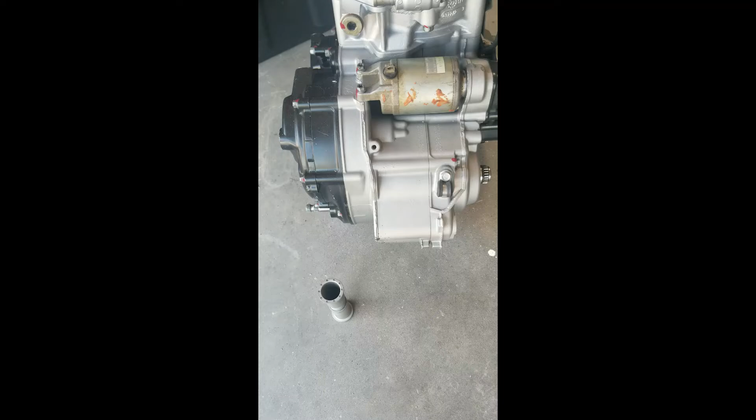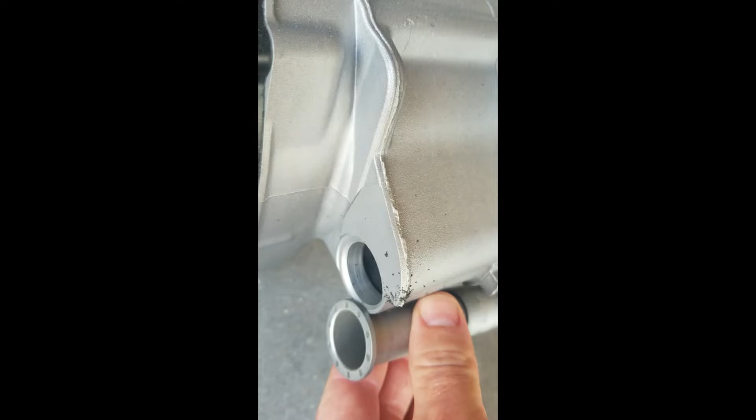Alrighty, so I'm getting ready to put the updated sleeve in this DS450 motor. This is the newer update, the last update they came out with for the cases. And as you can see, the cases get drilled out a little bit to accept this flush here. And then they'll go through both sides, right?

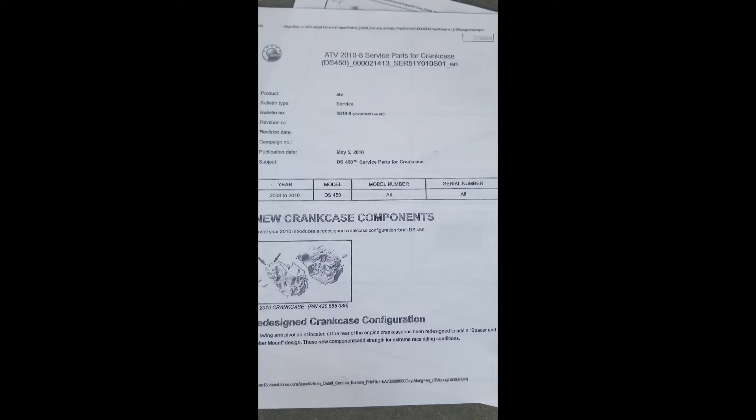And then this piece has a threaded center, and it has a right hand side and then a left hand side, as we're looking at the engine right now. Also, here are the actual installation instructions. So it talks about the new components, the redesign, what needs to get changed, the install and torques and stuff like that, the parts you need, the special socket holder, and then the torques in the back.

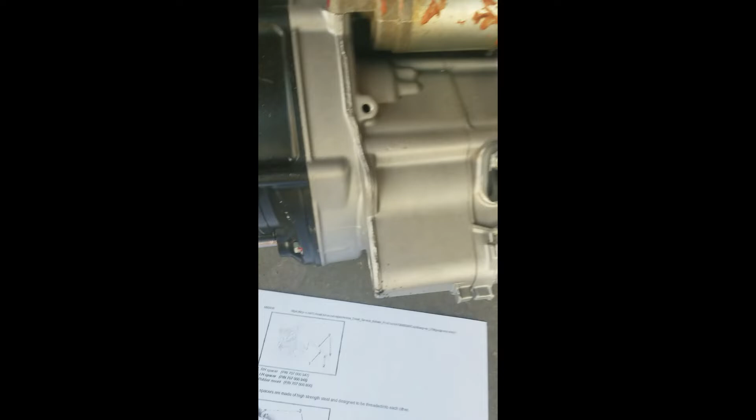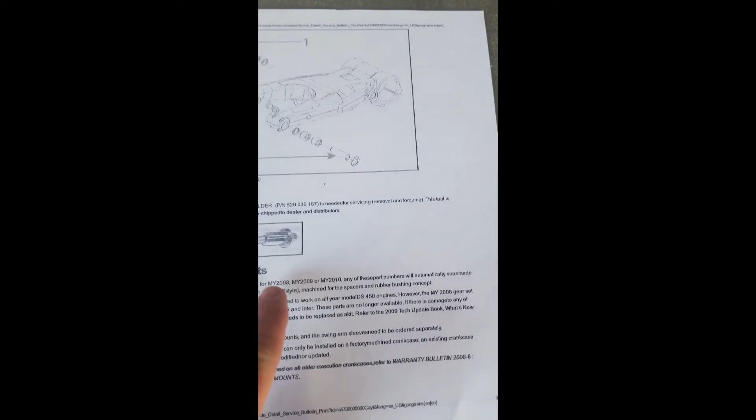It is possible to take the older cases, the 2008s and such, and get those cases re-drilled. The only place I know that does it is actually BCS in Massachusetts. They will do it, but you need the engine apart to ship it to them. As far as I know, the engine needs to be apart. If you order a 2011 and up, those cases should already be ready for this version. I believe so, just reading the instructions here, where it talks about model year 8, 9, 10. Anything else would be superseded.

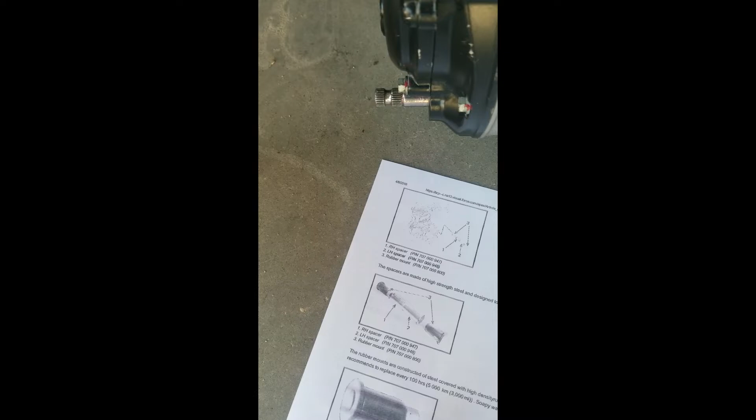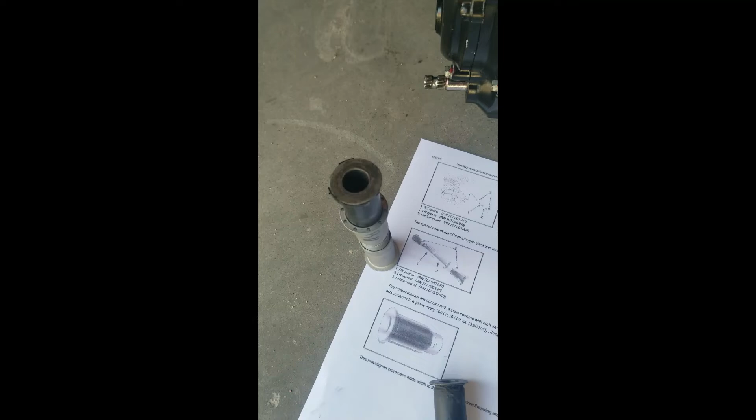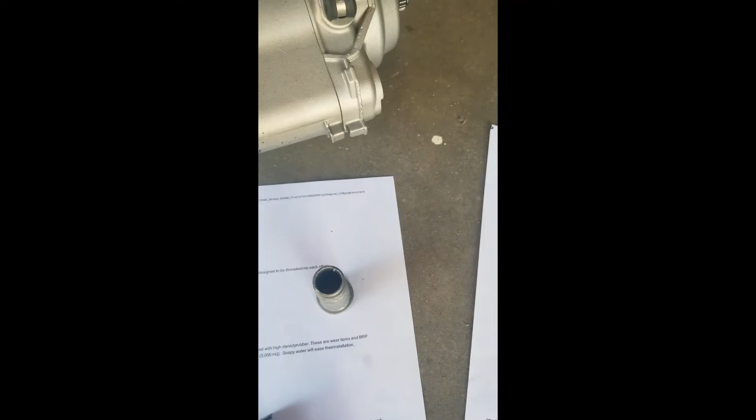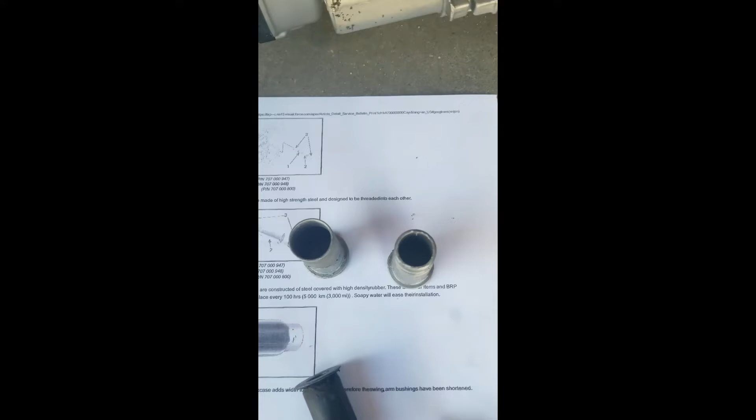And then here's the rubber inserts. This is what goes in between here, like so. They get all pressed together, and then the swing arm bolt is what's going to go through here and through the engine. The other thing I'm going to do for the install of these, I'm going to apply anti-seize on both sides, because it doesn't talk about it in the instructions, but with past experience, since the block is aluminum and these are steel, two different metals is going to cause some pretty fast corrosion. And the threads on these two items are extremely tight, super close tolerance, and the threads also have Loctite on them. Alright, I'm going to go ahead and install them.

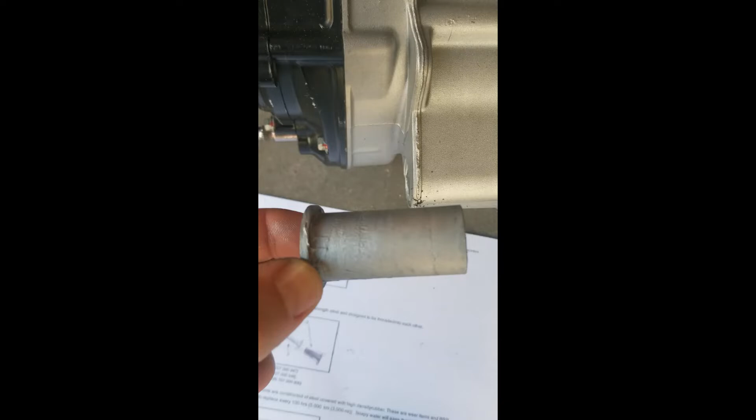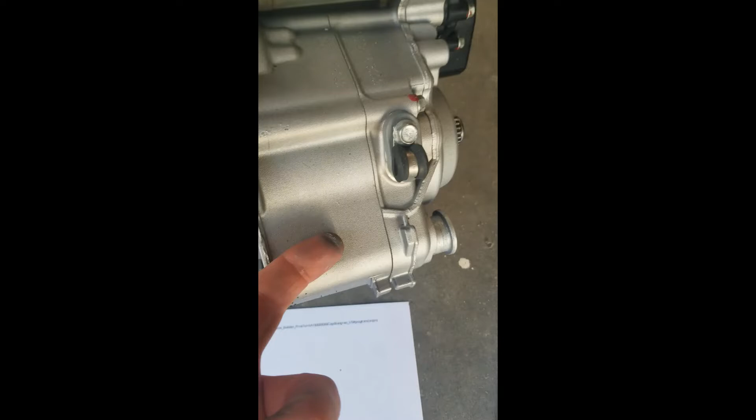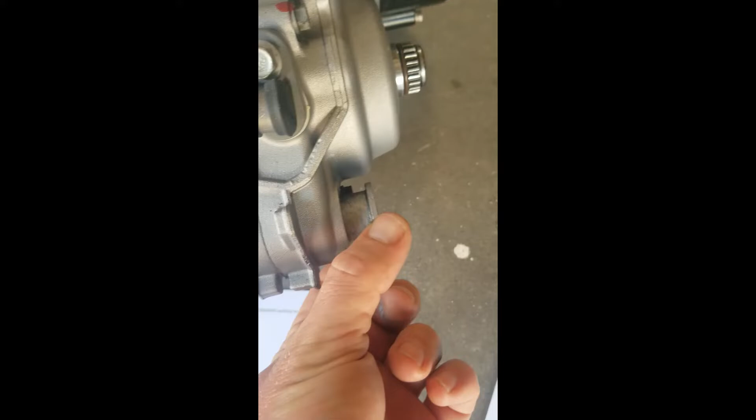Alright, so that's what they look like set in place, and then here's the rubber. The rubber's going to get pressed in there later. I applied anti-seize to this edge here, and the internal threads also got anti-seize, just to keep the mount from seizing inside the motor. I think that's just a good step. The block is aluminum and the sleeve is steel, so it's a good cause for dissimilar metals causing some severe corrosion. And then the same with the other side. I'll anti-seize them, and then I'm gonna put them together.

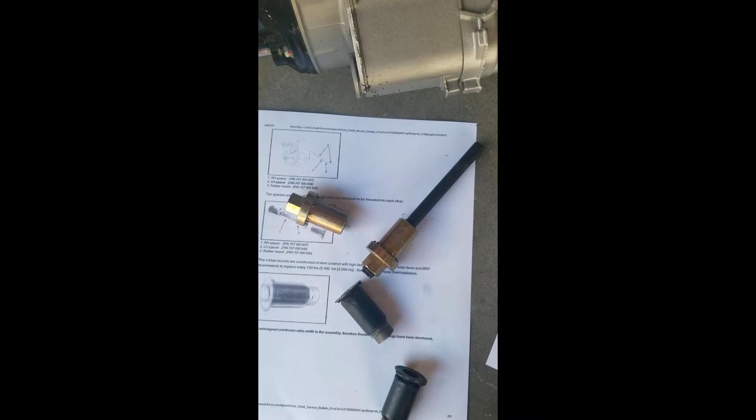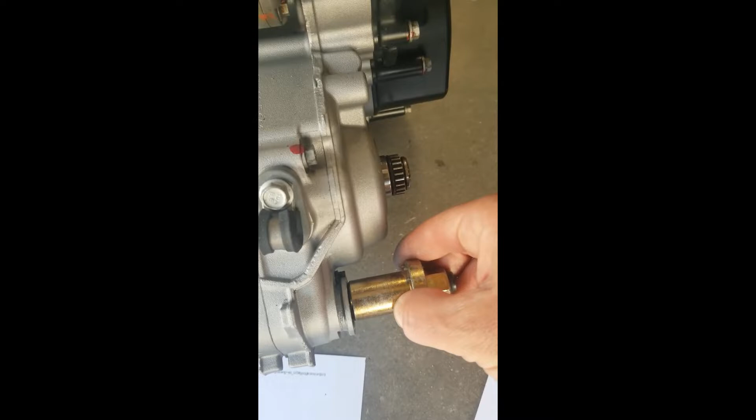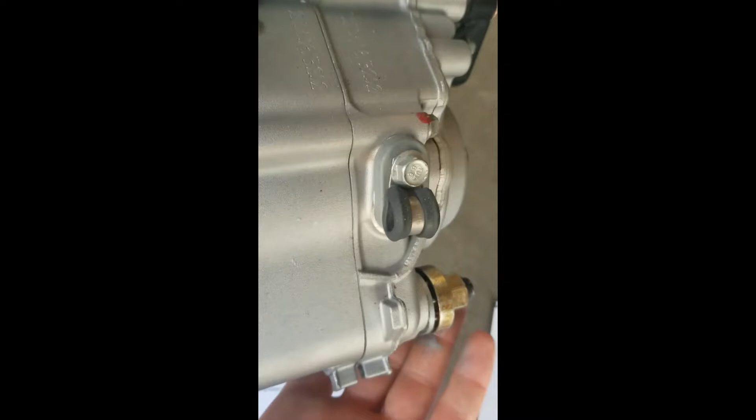Alright, and then the other piece to this is the special installer. See how it has the spline that matches to the holes in the sleeve, so that way you can tighten both sides. And then here's the other side. You line it up, lock it in there. Lock it in there. And that's the process, like that.

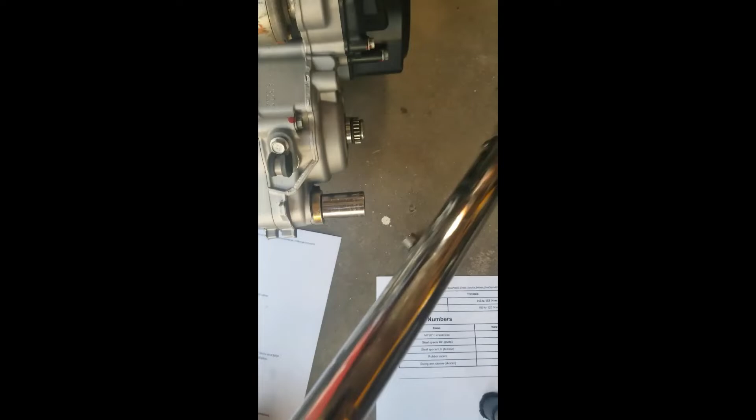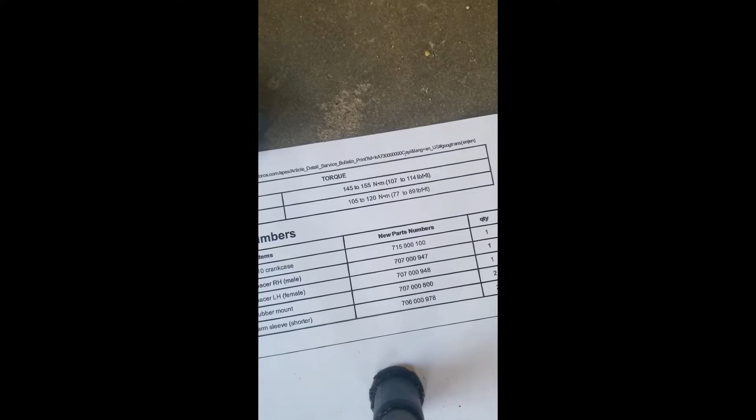Alright, next step in this process is a 17mm socket, 17 both sides, and then you'll be able to torque this down. The way I'm going to do this, since I only have one hand on my cell phone, is I'm going to step on the wrench, and then put the torque wrench on the other side to torque it down. The torque on this is 107 to 114 foot-pounds for the Americans. That's actually a moderately decent torque. So I'll see how well this goes together.

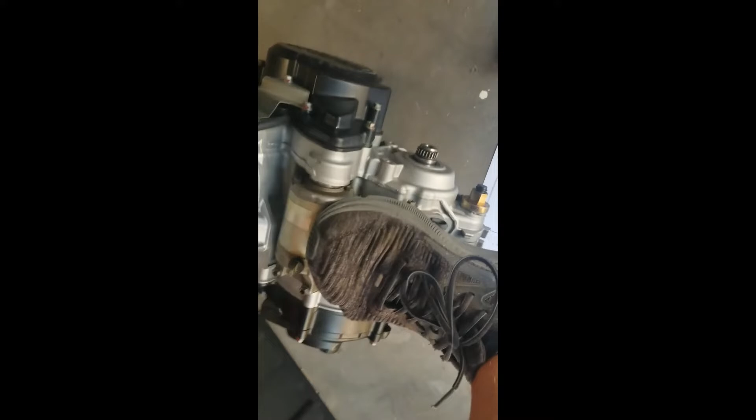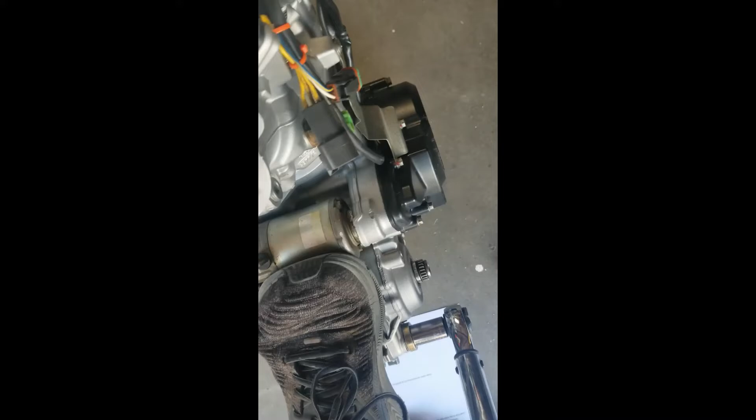Alrighty, got it all torqued down, 110 or so foot-pounds. That is quite a bit. So the way I did it is basically had my foot up here, had the torque wrench right here, and then having my other hand on top of the engine, I was able to kind of balance it all and torque it down.

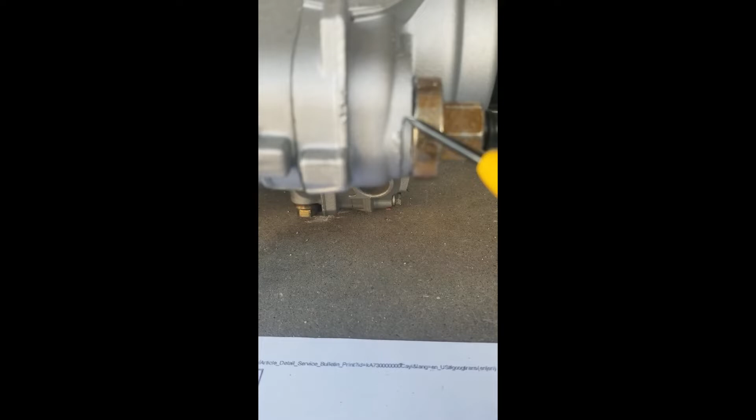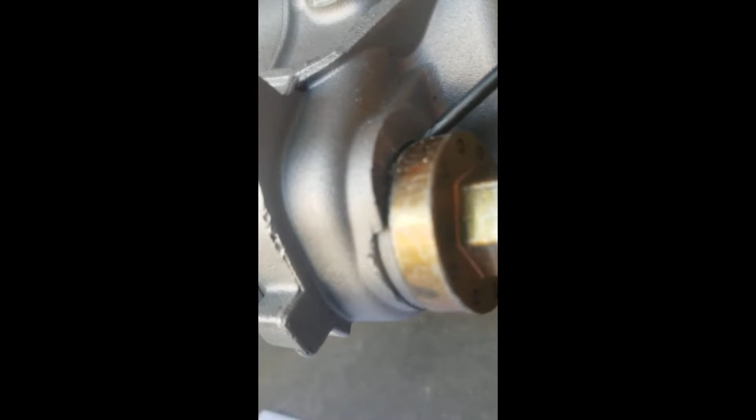The other thing that I recommend is when you apply the anti-seize, put it on this edge here as well. Let's see if it'll focus. Put it on this edge right here. So then this gap, right in here, between the insert and the block will also have a nice little bit of anti-seize on it to prevent that corrosion and prevent those pieces from locking up.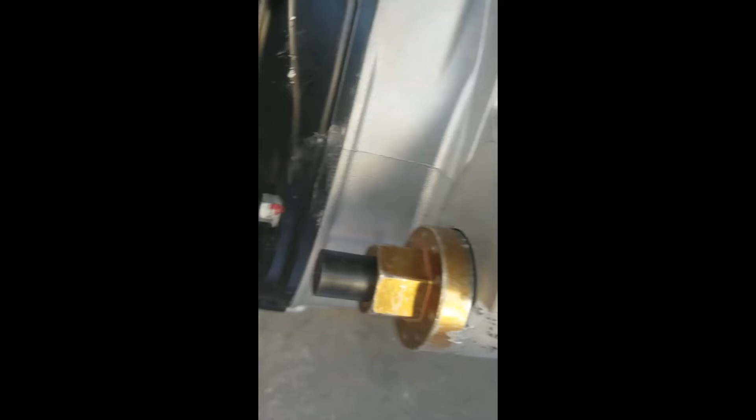Alright, so now, sad thing is, these golden ends are stuck, so I'm going to try and get a little pry bar in here and work it apart little by little.

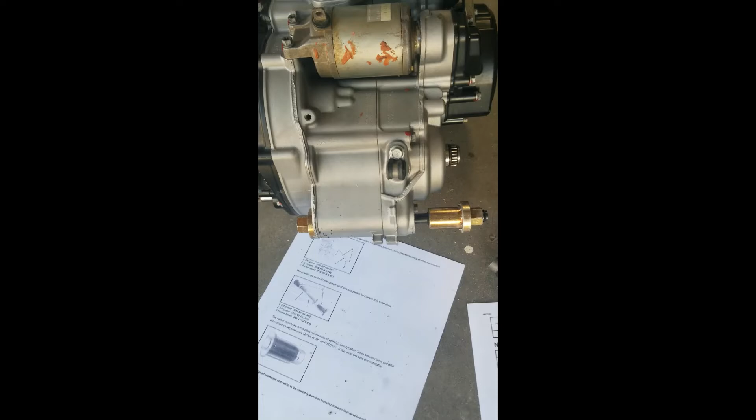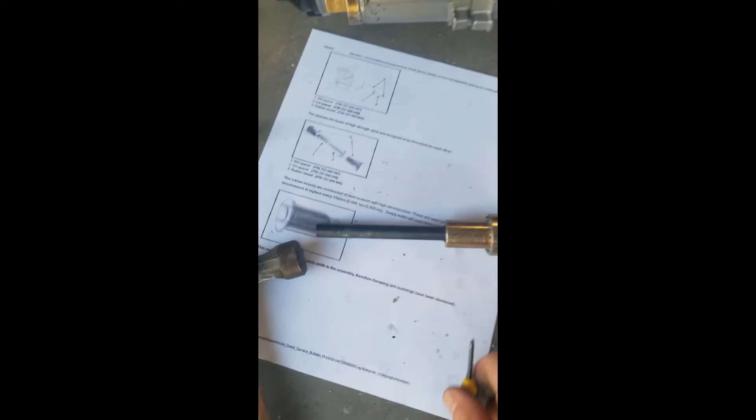Alright, so I was able to get it to pop out. The one thing I want to bring up is when this is in here, and it's all locked into place. The big idea is to come over here and smack this with a hammer to pop it all out, right? However, don't really do that, because all that's here is just this rubber O-ring, and that's just rubber, so when you're hitting this end, it's not really transferring the energy very well. So just be mindful of that.

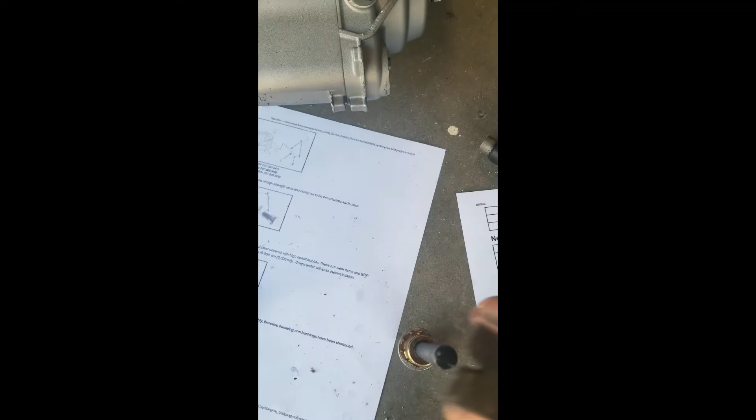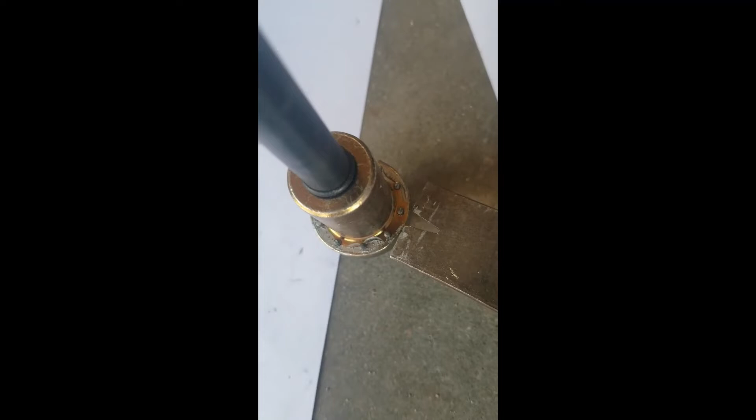The way I did it, I had it stuck in there, and I just took this tiny crowbar and was able to work in there slowly but surely and pop it off. Take your time, because these pins aren't really that deep. So when you're using your pry bar, let's see if it'll balance. Using your pry bar, you're prying on it. See, the pry bar doesn't have a whole lot of leverage by the time you hit those pins. So just be nice and gentle, and it'll eventually come off.

And then luckily, going the other way, you can either get a big punch, right? Come through here with the big punch, straight through that way, knock it out. Or now, give it some taps. More taps than I thought. Just like that. It'll pop out.

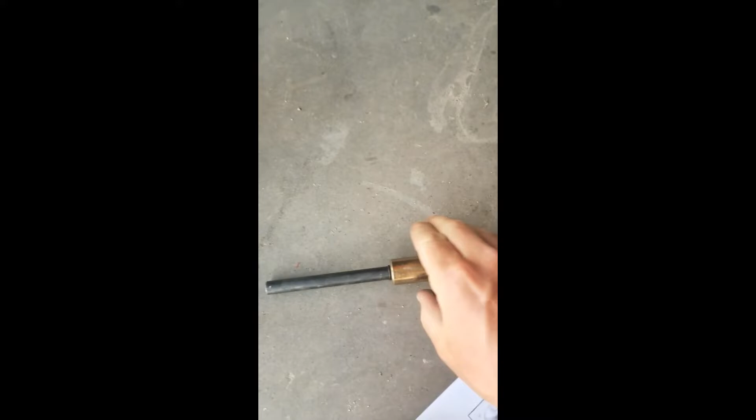And there you go. This is my first time ever doing these myself, but I've read a lot about them, and I've been in the scene for quite a while to know the details. So there's that piece. You need this tool. There's no way I can imagine trying to torque these down at 100 foot-pounds.

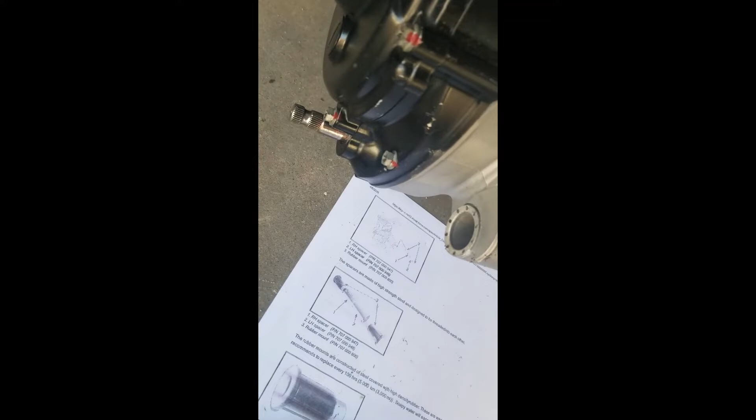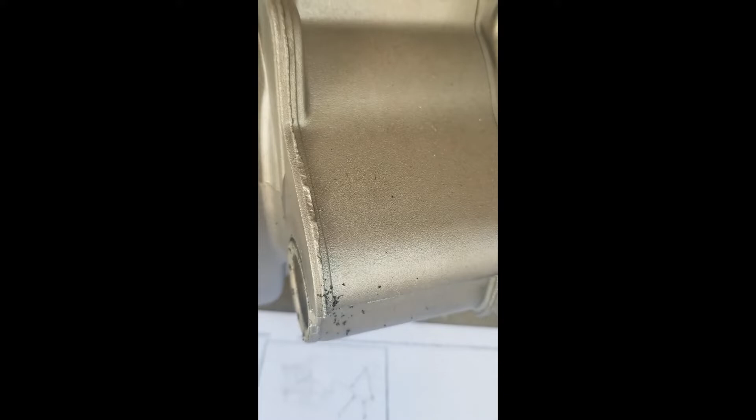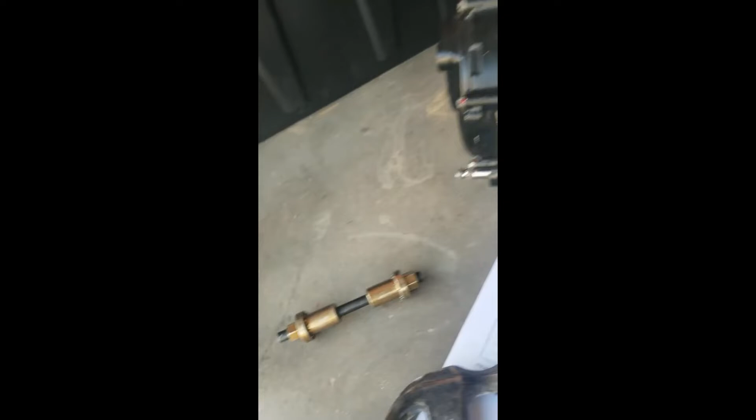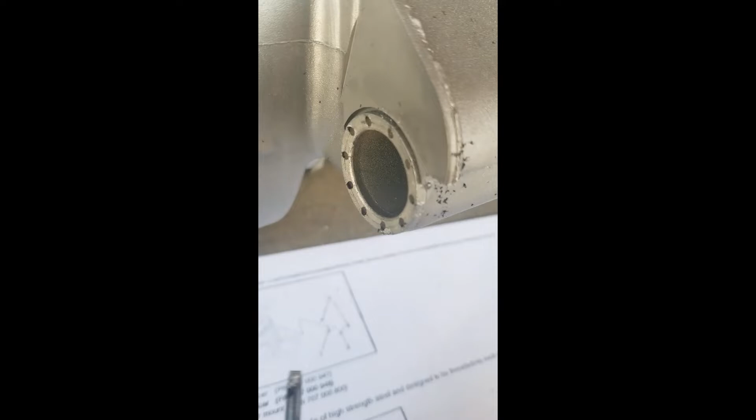Oh shit, you know what? I don't know if my torque wrench is off or what, but, oh, you can't see in there. But look at this. See that metal stress right there? So I wonder if the publication torque spec is wrong, because that is clearly stressed.

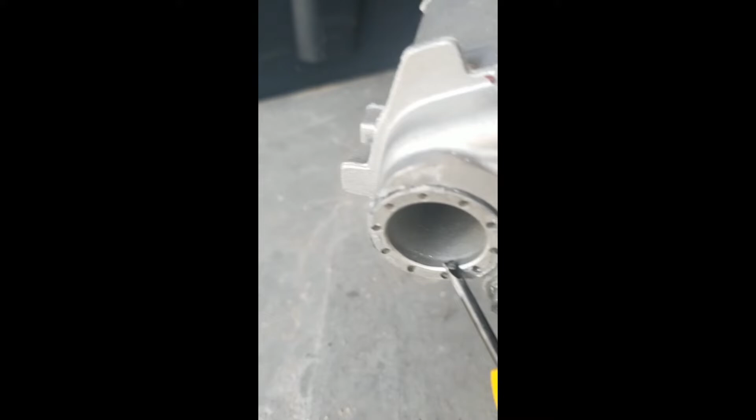And even looking down at that insert, it's pretty easy to see that it has a concave trajectory or direction. And then this side is definitely the same. Well, shoot. That's not a very good discovery. So yeah, maybe my torque wrench is off, and that was causing the stress, but plain as day, 107 to 114 foot-pounds.

So, I got nothing to say. I don't know what I would recommend to do instead of that, except for less, unless, like I said, my torque wrench is off. So I will leave it at that and see what I discover later.

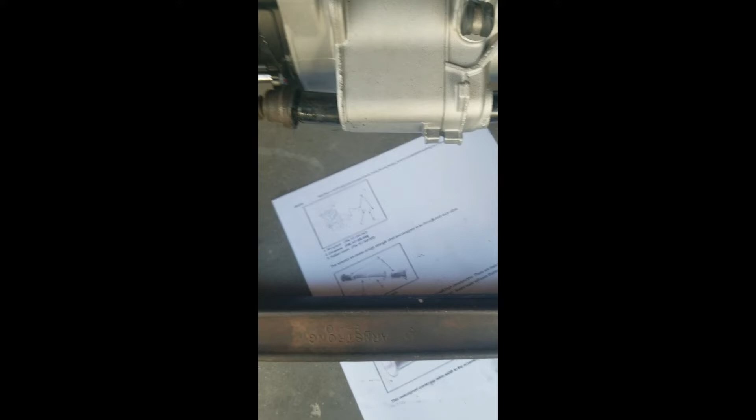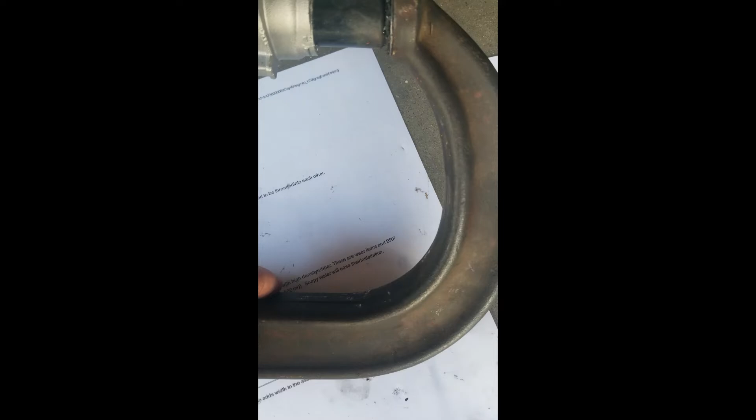Okay, so here's the next part. I'm just gonna go with those inner bushings the way they are, because I'm worried if I take them out they'll just crack, so I'll just leave it the way it is. But with the rubber bushings, I just used laundry soap to put a little soap and water on them, and it even says to do that in here as well. So I have this big C-clamp. I'm going to start cranking them down and see how it works.

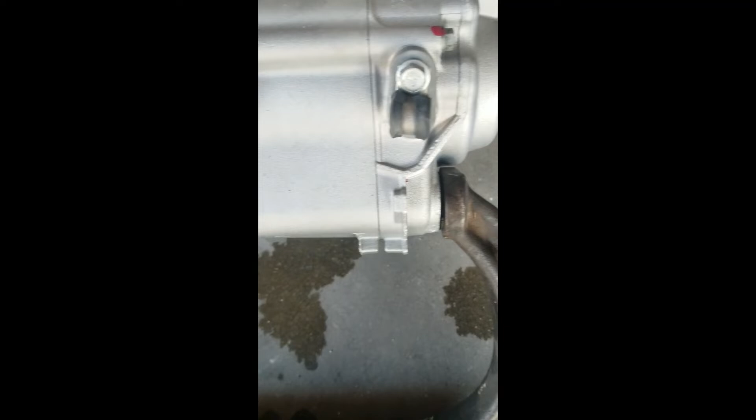Okay, progress so far. The right side went in no problem. The left side is kind of bulging out on me a little bit. I just put some more soap and water in there. But when I crank on it, you can kind of see how it squishes. So that just might be the cost of doing business. I don't really know. But I'm going to keep spinning it, and hopefully it'll flush up in there. It seems like it's going somewhat. This side went in nice and smooth.

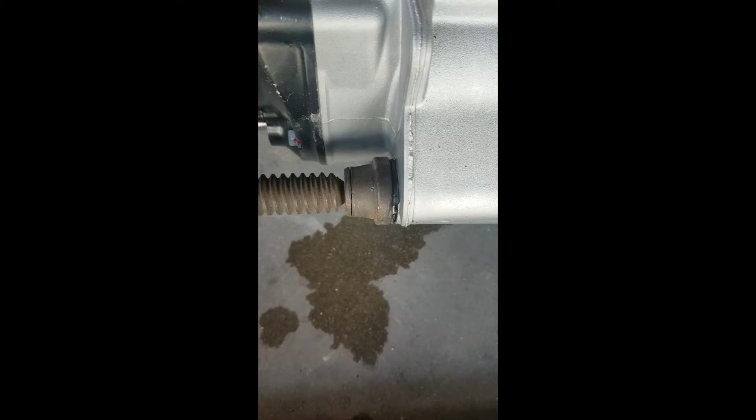Little crank. Yeah, there's that side. So that's good. And I got soap and water right here, more soap than water, and I was applying that to the inside of the bushings as time was going on. Okay, and that's it. It ended up squishing in there pretty good. It pushed itself out a little bit, but nothing too bad.

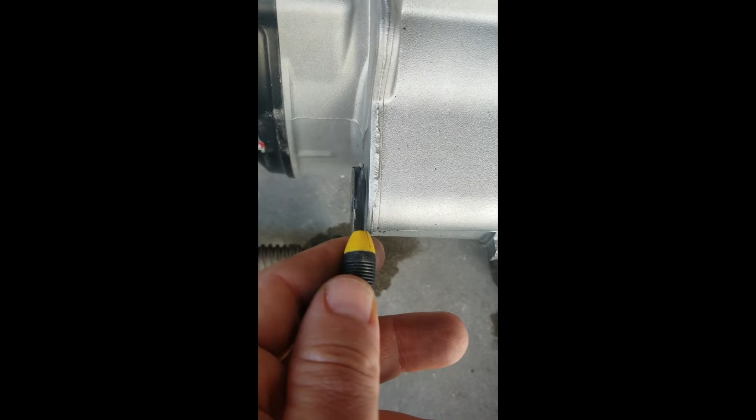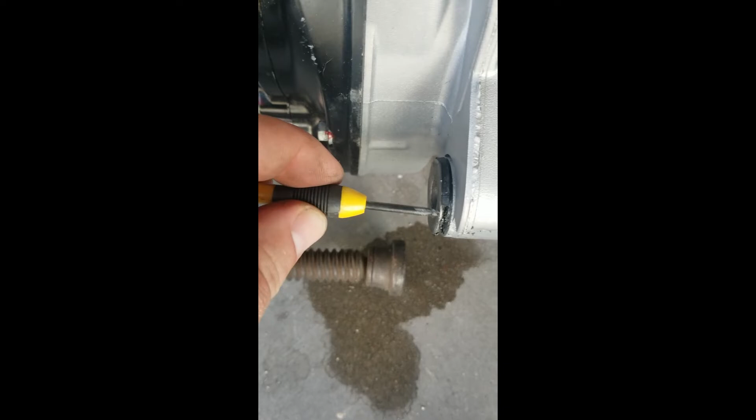Be it known, this thick rubber piece right here is actually part of the bushing, because you can see here it's missing. These rubber bushings are used, not new. So I think if they were new, the rubber would be the whole way around, and it would be that one little piece of protection between the sleeve and the rubber mount. So if the swing arm bolt is in here and it's trying to twist up, it'll help reduce that torsional impact.

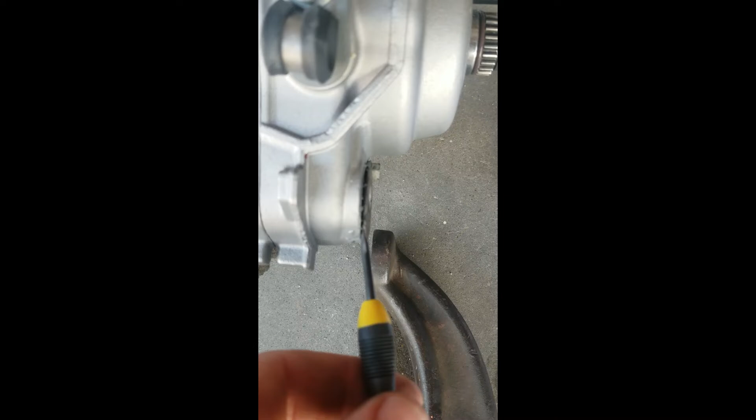And this side doesn't have it at all. It's all gone. There's just a little residue that's left, but I'm gonna leave it like that and bolt her up within the next week or so, get it installed.

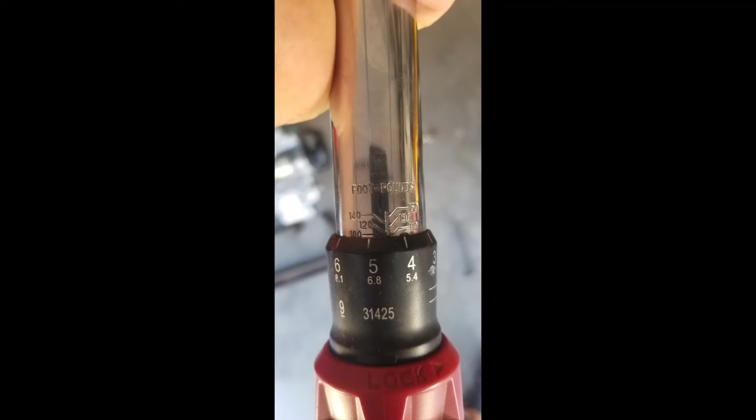So yeah, I did some more reading, looking at the torques to make sure I did everything right, and I double checked the torque wrench, and yeah, I'm definitely at just under 110, 105, give or take. So the fact that those bushings kinked in like that, I doubt they're supposed to do it, that's for sure. So it would just be wise when you're torquing them, maybe go a little less.

If I did it over again, I'd probably run 95 foot-pounds or so to prevent that from happening. But then again, I'm sure it's a pretty stressed place, having that bolt go through here. So having it torqued down nice and tight is also wise. So I don't know, not really sure.

So I went ahead and double checked these to make sure the Newton meter conversion was correct to foot-pounds, and everything was. Maybe I was thinking there was a typo, and that's the reason why I possibly may have over torqued those bushings. And then the other thing I did is I checked my torque wrench. The torque wrench looks like it's around 110 plus 5, so 115, give or take.

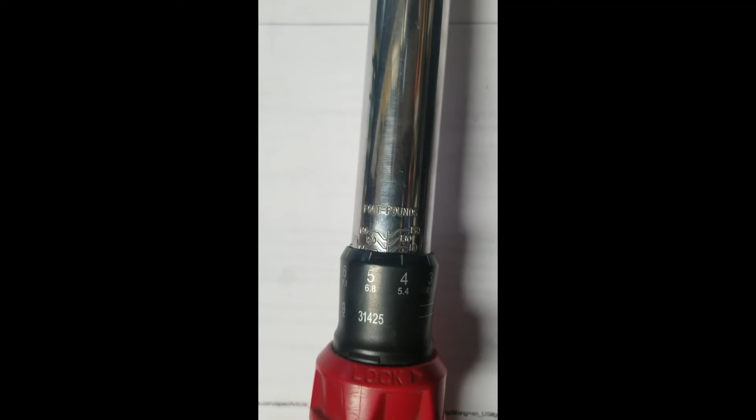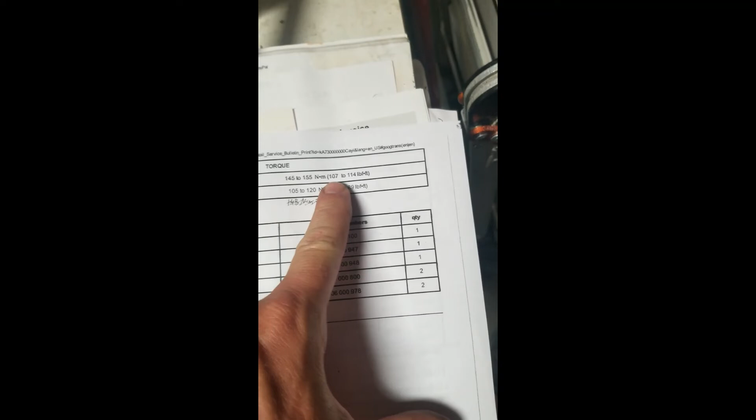So yeah, I guess I was a foot-pound over, but that was kind of interesting how that happened. I'll have to double check this torque wrench. Maybe the calibration's off, and then that kind of stressed those bushings. So word to the wise, just in case, I would run the lower, the 107 foot-pounds or the 145 Newton meters, and then see how that ends up.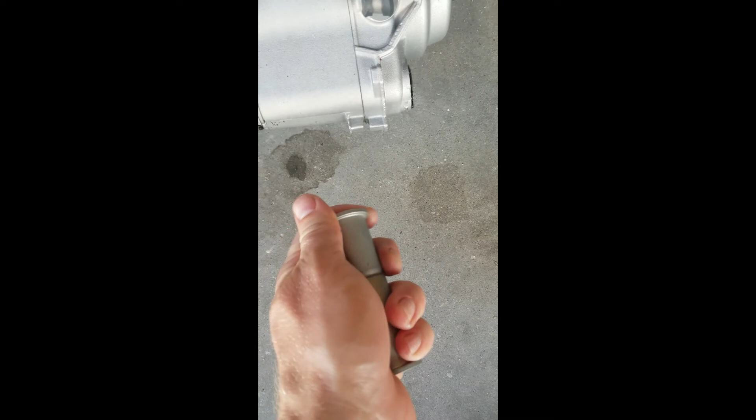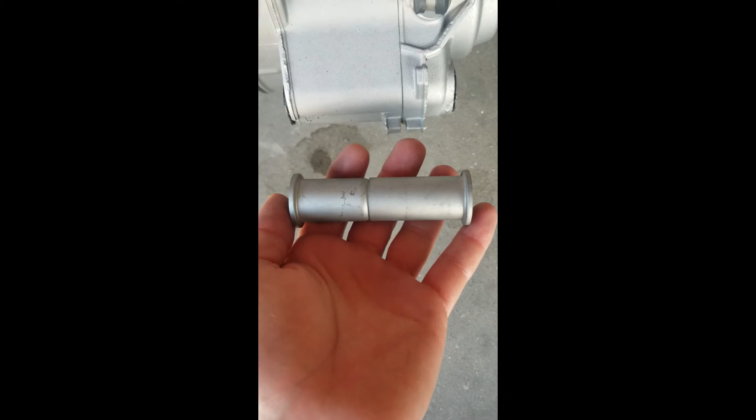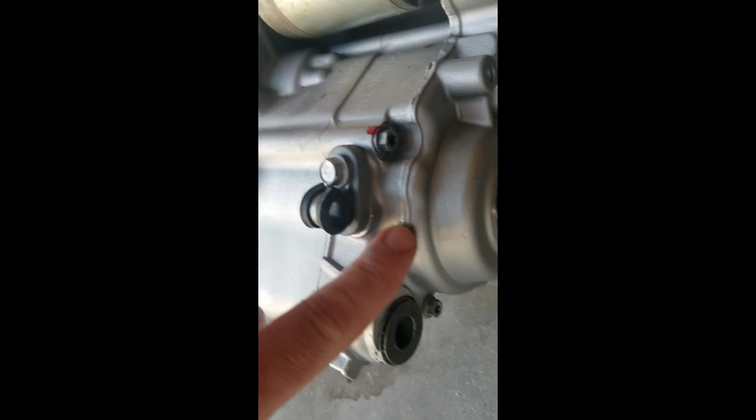Alright, so I got one last possible theory to figure out why those cracked. So here's the new sleeve I haven't used, and they thread together, right? And that's as tight, well, finger tight as these two will go. So one theory is, when I put the sleeve up to here, that's kind of the length of it. These cases were updated to accept this style of bushing. These were actually 2008 cases, which had a pretty big problem of stress cracks right through here, through the sprocket and such, from the stress of the swing arm.

The best way to prevent that, if you do ride hard, is to always make sure your swing arm bolt is torqued down. Over my years of racing, that's the biggest thing I've learned: if you're trying to keep those cases stock, make sure that swing arm bolt is always torqued and always tight. But coming back here, my one other idea, since I did follow the torque specs in the guide, is that when BCS updated these cases, they might have different dimensions that they follow. So the tolerances could have been off.

So by the time I was torquing it down, the torque was ending up on this lip coming into the case right here. And maybe it's designed from BRP such that it has more of a middle pressure, and the ending tightening should have been compensated in the middle here, not on the edges of these bushings. So yeah, that was my one other theory.

So to go back, maybe if you have 2010, 11 and up cases, or 2011 to stay safe, you won't have this stress problem that I did showing up on the inside, because there could be a different tolerance for this inside dimension, and BCS might not follow that quite so strictly, or just in the errors of manufacturing, stuff gets off. So that's my one other theory.